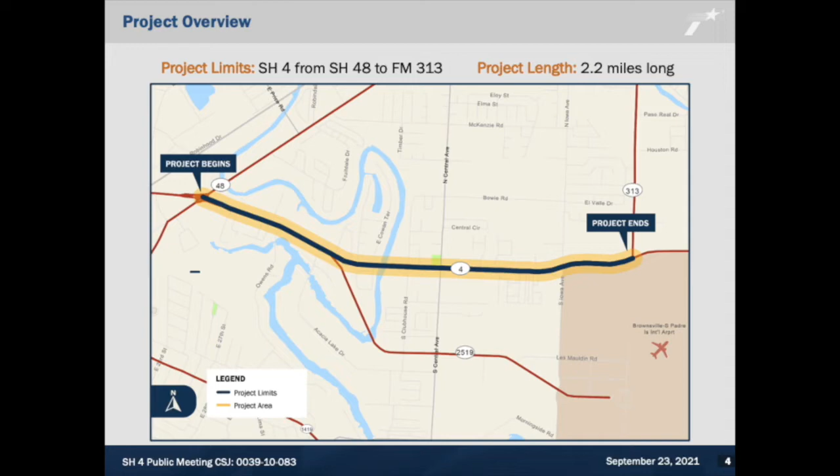The project limits for the SH4 or Boca Chica Boulevard Raised Median project are from SH48 to FM 313 or Minnesota Avenue. The project is about 2.2 miles long and is located within the city of Brownsville in Cameron County, Texas, north of the Brownsville-South Padre Island International Airport.

This section of SH4 serves approximately 37,000 vehicles per day between SH48 and FM 2519, and 18,000 vehicles per day between FM 2519 and FM 313 or Minnesota Avenue. This traffic in the roadway's current configuration generates congestion which is estimated to be 143,000 hours of delay per year for drivers, which led to over $3.2 million in annual congestion costs in 2019.

The existing roadway includes 2 travel lanes in each direction and an undivided roadway that allows for continuous left turns. There is no median nor barrier separating travel from the opposite direction. For pedestrians, sidewalks are discontinuous in the corridor.

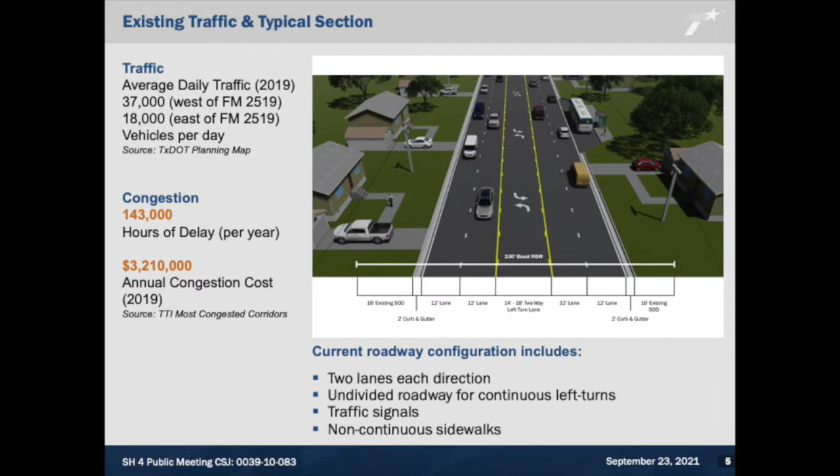The Texas A&M Transportation Institute completed a detailed safety evaluation of this section of SH4 in early 2020. The study found that between 2010 and 2018, 531 crashes happened along the alignment, resulting in 13 serious and 3 fatal accidents. Centerline crashes, or crashes that cross the center of the roadway, accounted for 19.4% of accidents.

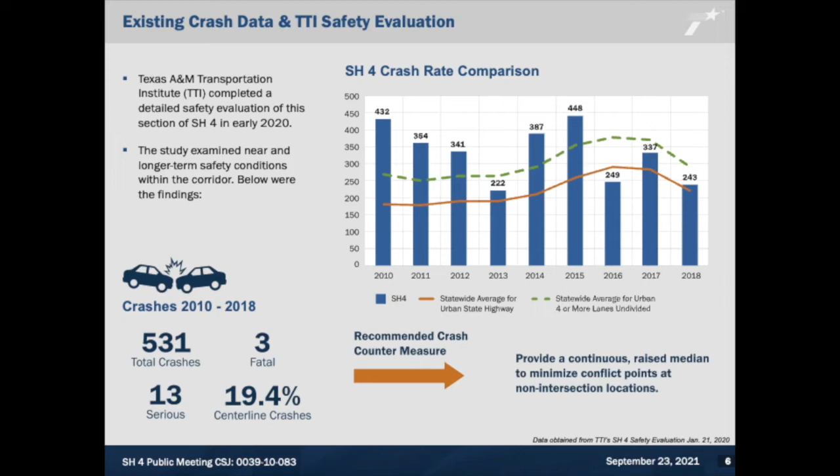The study recommended the installation of a continuous raised median as a crash countermeasure to minimize conflict points or opportunities for a crash to occur at non-intersection locations.

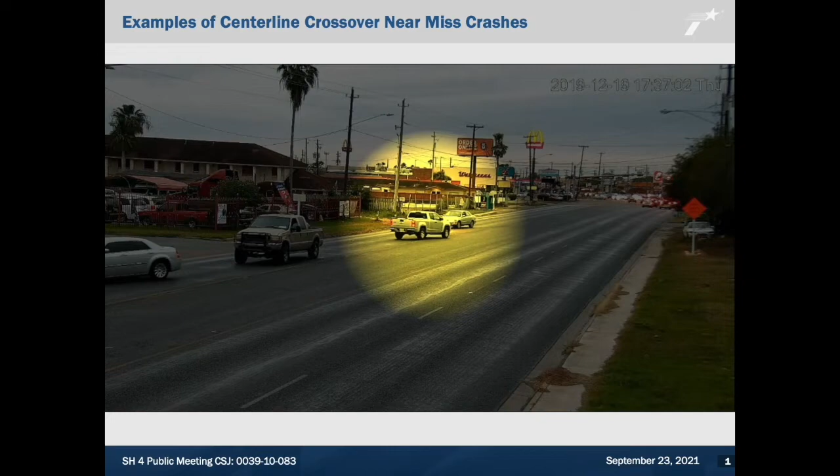The video shown here contains examples of near misses along the SH4 corridor. Throughout this video, there are multiple instances where drivers turning left out of adjacent driveways interfere with the through traffic lane. The two-way left turn lane further complicates the situation, causing unpredictable travel behavior which results in near-miss collisions.

A raised median would minimize the potential for crashes as well as near-miss crashes. As mentioned in the previous slide, crashes that cross the center line of the roadway accounted for 19.4% of accidents in the corridor between 2010 and 2018.

The SH4 Raised Median project is needed to reduce severe and fatality crashes and address discontinuous pedestrian accommodations. The purpose of the SH4 Raised Median project proposes to improve safety by installing a concrete raised median, improve safety by consolidating left turn movements, and to improve continuous sidewalks for pedestrian connectivity.

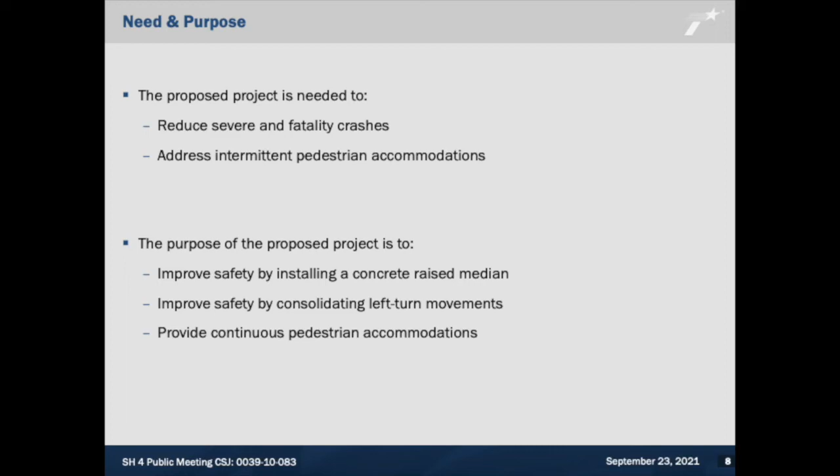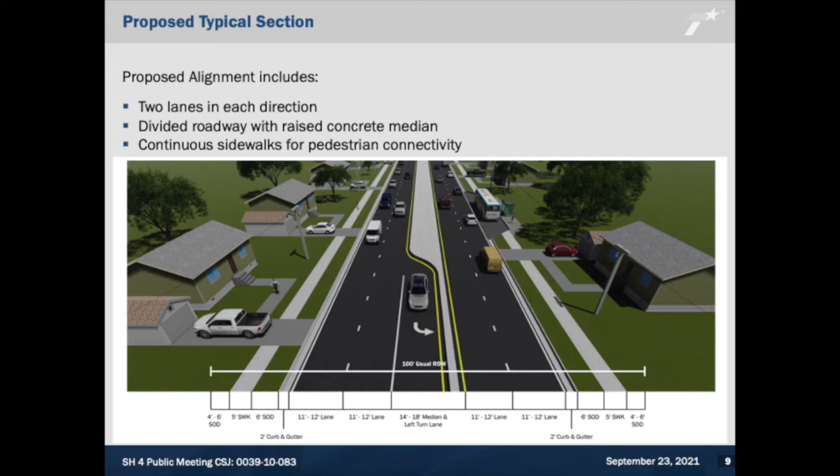The proposed typical section for SH4 resurfaces the existing 2 vehicle travel lanes in each direction, constructs a raised concrete median with directional median openings, and provides continuous sidewalks. No additional right-of-way is currently planned. The illustration shown highlights these proposed improvements.

The addition of directional median openings enhances safety by limiting the number and type of conflict points or opportunities for a crash to occur. Directional median openings provide left turn movements and restrict left turns from crossing streets or driveways.

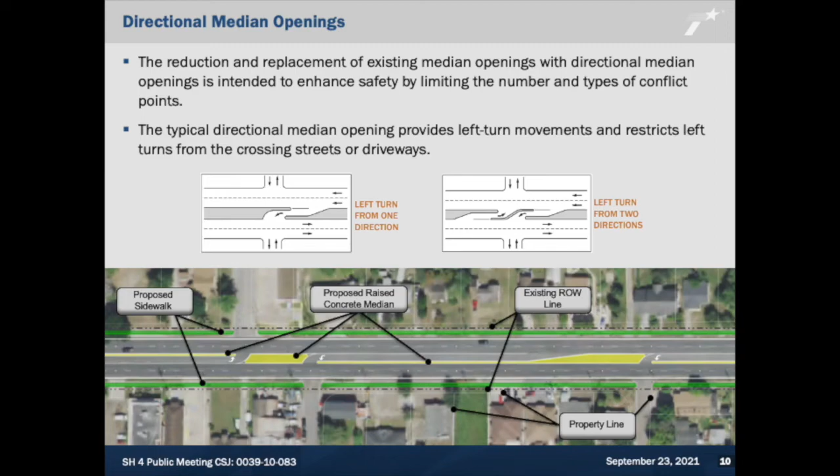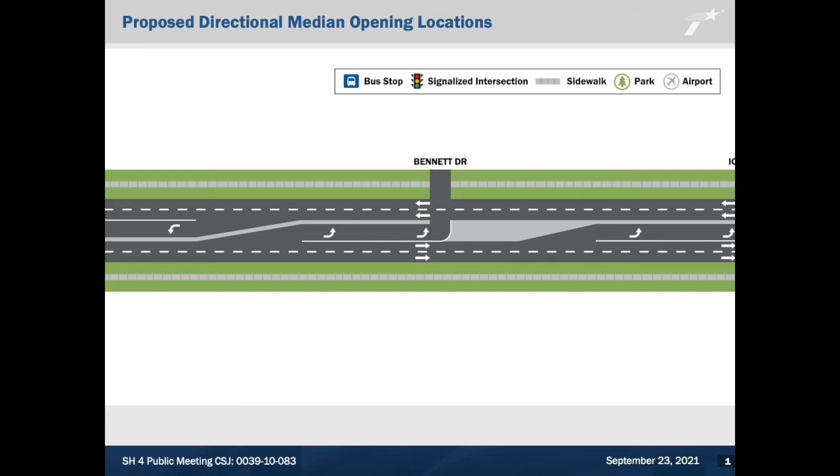The SH4 project also proposes to add continuous sidewalks in the corridor to provide additional connectivity for pedestrians.

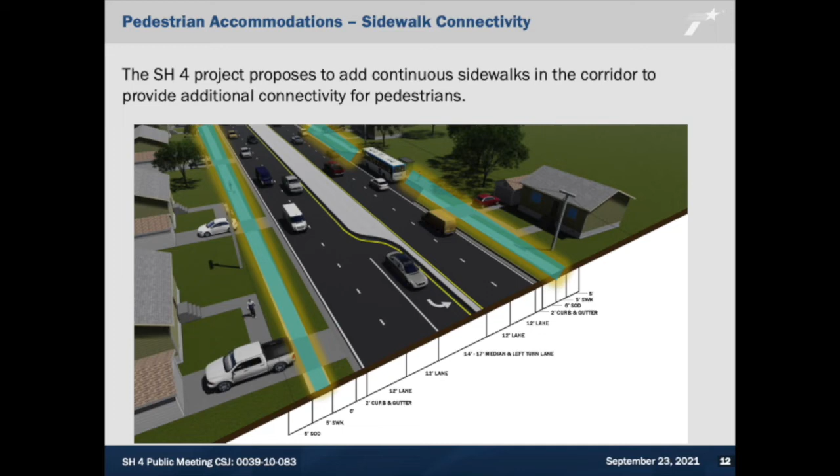Through this public meeting, we're requesting input from the public regarding the proposed design for this project. We will review your comments and continue to refine the proposed design and conduct additional environmental studies. Throughout this process, public input will be taken into consideration.

Construction is expected to begin in fall 2022 and last approximately 12 to 18 months. The construction cost for this project is anticipated to be approximately $5.3 million.